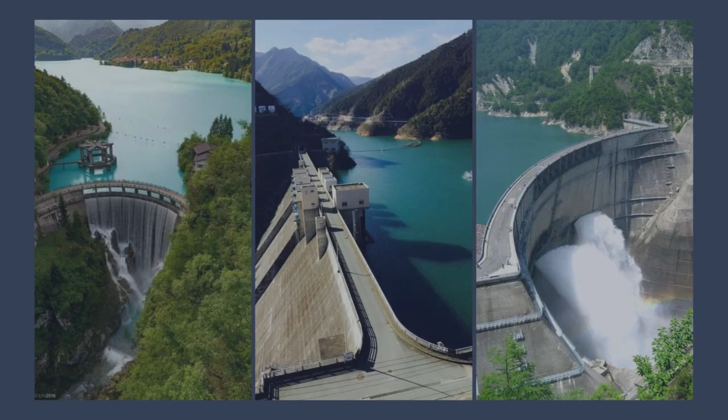Taman Universiti Parit Raja, located in Johor, has experienced recurring flash floods, particularly in a specific area outlined in red. These floods result from intense rainfall events and pose a significant threat to the local community and infrastructure.

The flood event was triggered by intense and prolonged rainfall, resulting in a significant volume of water runoff that overwhelmed the existing drainage system. The heavy rainfall, combined with the area's topography and inadequate drainage infrastructure, led to the rapid accumulation of water in the low-lying and vulnerable sections of Taman Universiti. To address this issue, a comprehensive study is undertaken to identify the cause of flooding and propose effective flood mitigation measures.

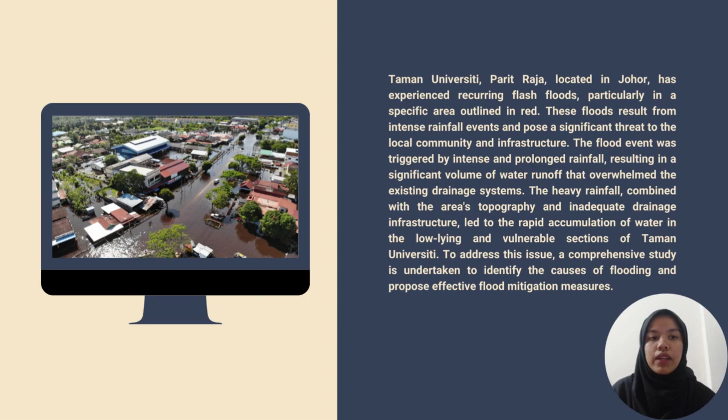The problem statement: the recurring flash floods in Taman Universiti Parit Raja have led to detrimental consequences, including property damage, disruption of daily life, and potential risks to human safety. It is imperative to analyze the underlying factors contributing to the floods and develop sustainable solutions to mitigate their impact.

The objectives of this project are, firstly, to identify the causes of flash floods in the outlined area of Taman Universiti Parit Raja based on the available data and analysis. Secondly, to assess the vulnerability and impact of the floods on the local community, infrastructure and the environment. Thirdly, to propose an effective flood mitigation method tailored to the specific conditions and layout of the area, considering its feasibility, sustainability and cost effectiveness.

Fourth, to enhance the resilience and sustainable development of Taman Universiti Parit Raja by implementing the proposed flood mitigation measure and reducing the frequency and severity of flash floods. And lastly, to contribute valuable insights and recommendations to the local authorities and stakeholders involved in flood management, providing guidance for future planning and decision-making processes.

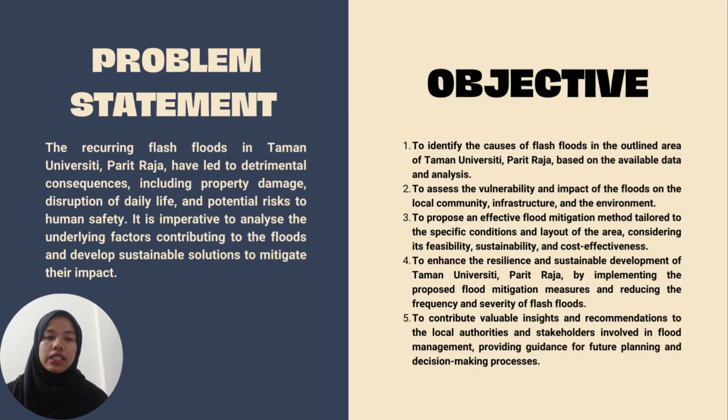Flash flooding is a rapid flooding of low-lying areas, such as rivers and dry lakes. Flash floods may be caused by heavy rain associated with severe thunderstorms, hurricanes, or tropical storms. Flash floods occur within a few minutes or hours of excessive rainfall, a dam, or levee failure. Flash floods can roll boulders, tear out trees, destroy buildings and bridges, and scour out new channels.

Some safety things we can do are evaluate the furnace, water heater, air conditioner, and other utilities. Second, install check valves in sewer traps to prevent flood water backups. Next, construct interior barriers to stop low-level flood water from entering the basement. Lastly, seal walls in the basement with waterproofing compounds to avoid seepage, and do not forget to remove important papers and possessions from the basement.

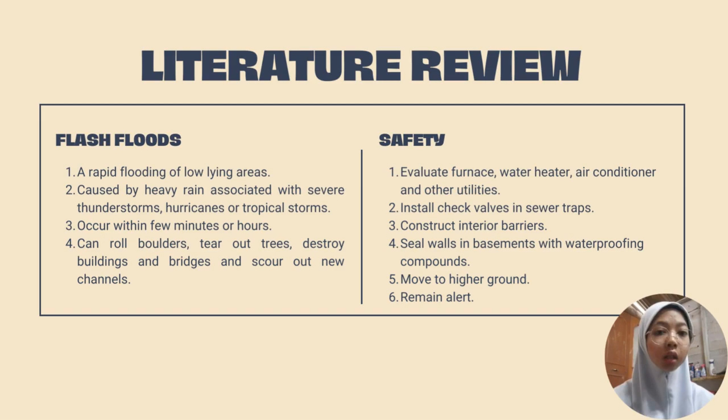Other than that, some safety rules during periods of heavy rain are to stay away from flood-prone areas such as stream beds, drainage ditches, and culverts. Next, move to higher ground if flooding threatens the area. If we live or work in flood-prone areas, remain alert during periods of heavy rain. Be really cautious at night as it is harder to recognize flood dangers.

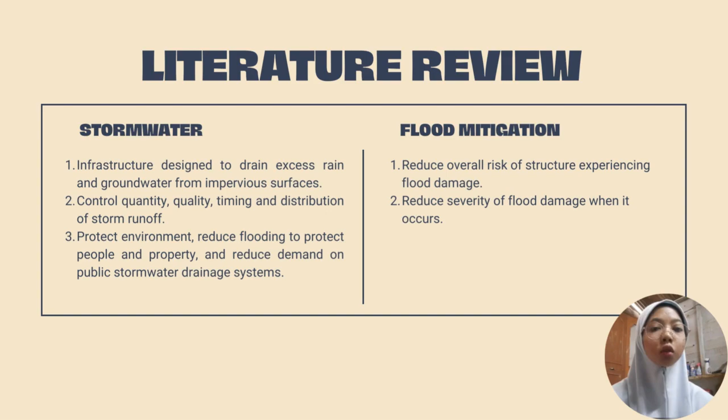A stormwater drain is infrastructure designed to drain excess rain and groundwater from impervious surfaces such as paved streets, car parks, parking lots, footpaths, sidewalks, and roofs. A stormwater system is designed to control the quantity, quality, timing, and distribution of storm runoff. Stormwater management is to protect the environment, reduce flooding to protect people and property, and reduce demand on public stormwater drainage systems. Flood mitigation can reduce the overall risk of a structure experiencing flood damage and also reduce the severity of flood damage when it occurs.

Now, I will present part of the methodology. The first method that our group is using to solve the problem is the Manning roughness equation. The Manning roughness equation is utilized to determine various parameters related to the flow of water in an open channel, such as cross-sectional area, channel slope, Manning roughness coefficient, or normal depth. The equation is Q = (1/n) × A × R^(2/3) × S^(1/2).

Q represents the volumetric water flow rate passing through the stretch of channel. A represents the cross-sectional area of the flow perpendicular to the flow direction. S is the bottom slope of the channel. n is the Manning roughness coefficient, and R is the hydraulic radius. The formula for R is A over P. As we can see in the flowchart on this slide, there is the flow to get the value of Q.

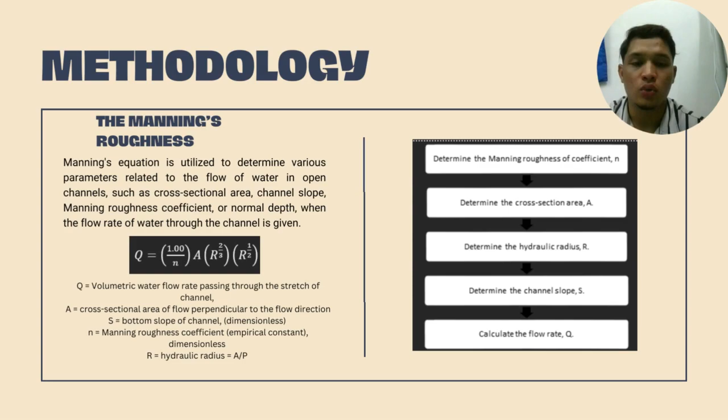Next is channel dimension and area. The channel used in this problem is a trapezoidal channel. The dimensions for this channel are: the bottom is 3800, the top is 5800, and the depth is 1600.

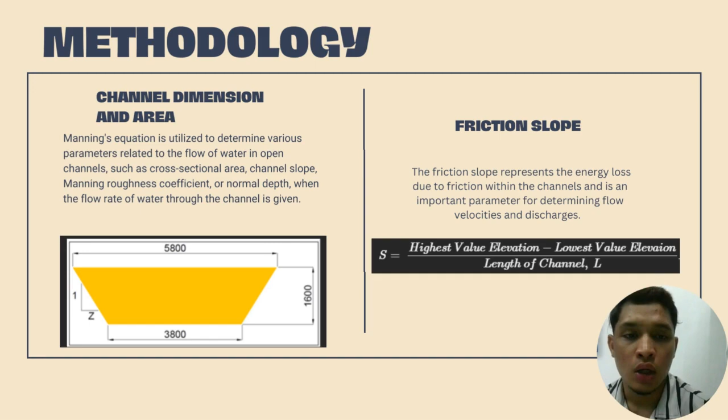Next is friction slope. The friction slope represents the energy loss due to friction within the channel and is an important parameter for determining flow velocities and discharge. The formula for friction slope is the highest elevation minus the lowest elevation divided by the length of the channel.

Next is empirical IDF curve. Empirical IDF curve is an equation that allows for the minimization of error when estimating rainfall intensity value from the IDF curve. The formula is I equal to lambda times t power of k divided by d plus theta power of n. I represents average rainfall intensity, t is average recurrence interval, d is storm duration, and lambda, k, theta, and n are fitting constants depending on the rain gauge location.

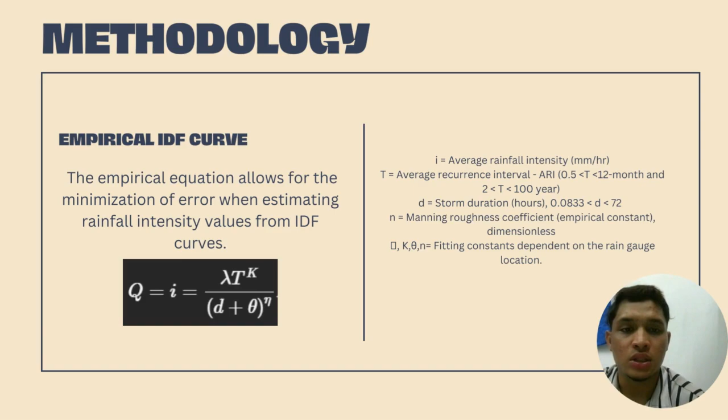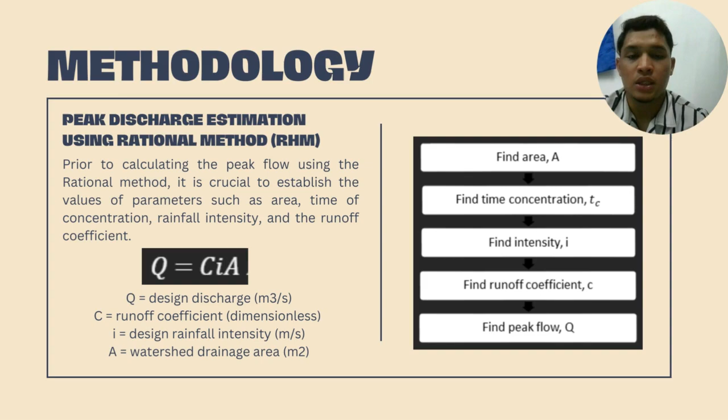For the data and result analysis, firstly, in order to do our calculation, we have to identify the location of the project or case study we have done as a group, which is in Taman Universiti Parit Raja. The drainage we choose is the main drainage that conveys through the network of the residential and shopping area. There are McDonald's, houses, residentials, and a supermarket there. Therefore, we have to calculate the catchment area for those parts.

The area of the case study is estimated using Google Earth Pro. By using Google Earth Pro, we can calculate the area using the polygon tools provided by the software. The total area is 3.77 hectares. Why do we use hectares? Because in the calculation in the Urban Stormwater Management Manual for Malaysia, the calculation uses hectares and acres to simplify the calculation and to cancel out any other area or units used in the equation.

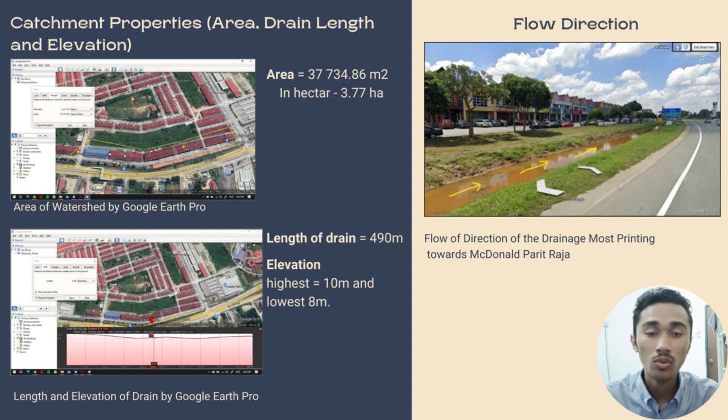As usual, before we calculate anything in the hydraulic subject, we have to identify the parameters of the channel. Firstly, we have to calculate the cross-sectional area of the channel. The channel or drainage is trapezoidal shape, as illustrated in the slide. The top width, bottom width, and depth were measured on site with other group members for us to obtain.

Meanwhile, for the calculation, we use Manning's equation and Manning's roughness coefficient. What is Manning's roughness coefficient? It is the degree of roughness of the surface of the channel. In this case, the channel uses long grass as a type of cover to protect the soil, and this becomes the surface of the channel. We also have to find the slope of the channel bed.

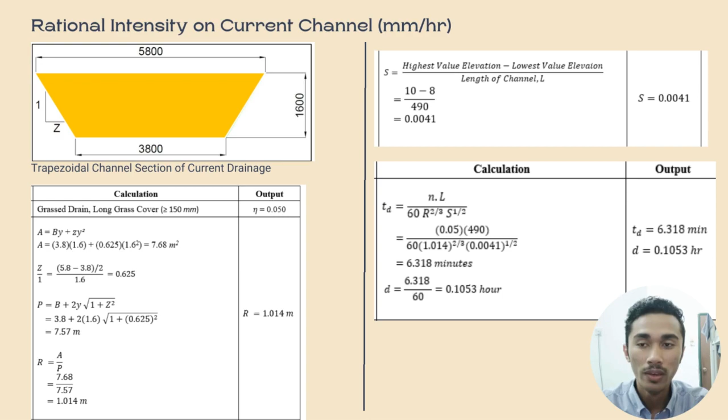For this slide, we are going to show the calculation we have done to calculate the rainfall intensity on the catchment area or the studied area. In order to calculate the rainfall intensity on the area, we must know the state, the station ID, and the station name. This can be obtained from the Urban Stormwater Management Manual for Malaysia.

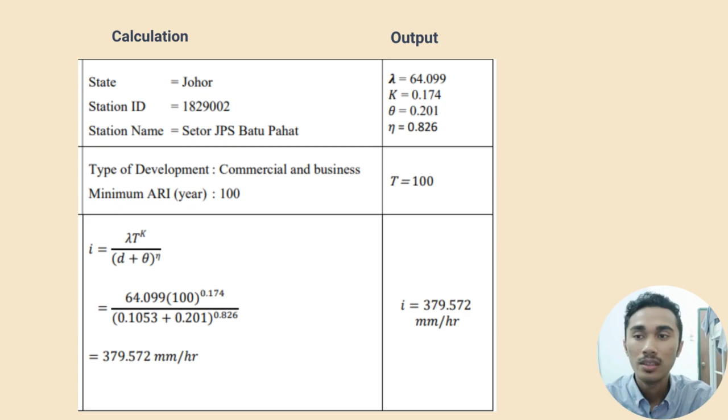To finalize the calculation for the current channel design of the drainage in Taman Universiti Parit Raja, we must calculate the Q peak during the rainfall or storm of the area. This can be calculated using the rational method, using the rainfall intensity we calculated just now in order to get the Q peak, which is the peak discharge, the maximum discharge at that time. So we obtained the maximum discharge of 3.78 meter cube per second.

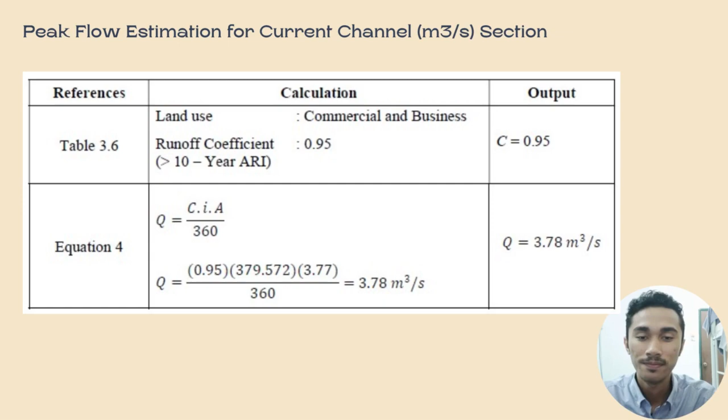After we have calculated the maximum discharge, or Q peak, of the current design of the drainage in Taman Universiti Parit Raja, we have to calculate the new discharge value to be used as an indicator to show whether the new design is sufficient enough to negate or mitigate the flood that occurred during March 2023 at Taman Universiti Parit Raja.

For our proposed new design for the drainage, we are still going to use a trapezoidal cross-sectional channel, as shown in the slide. We're going to enlarge the area by giving more depth and width to the channel. We're also going to do some adjustment on the elevation to increase the slope, hence increase the velocity of the flowing water in the channel.

Because the channel discharge is calculated by Q equals VA, we can calculate that discharge is influenced by, or directly proportional to, the area of the channel. So firstly, to calculate the Q design, or new discharge design, and compare between the new design and the current design of the drainage, we can calculate the area as the first step, along with the hydraulic radius, in order to use the Manning coefficient.

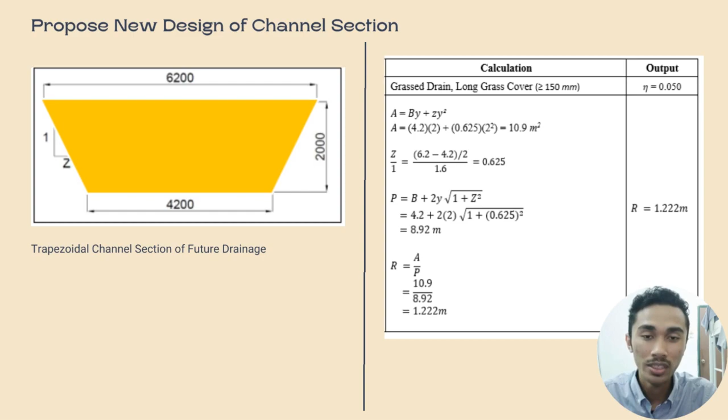As for the last calculation for the new design of the trapezoidal channel in Taman Universiti Parit Raja, we must calculate the area, the hydraulic radius, the slope, and the time of concentration and rainfall intensity on the catchment area. The difference between the current design and the new design we have proposed is in its area and its slope.

Therefore, the amount of rainfall intensity it can withstand before it flows over or rises onto the ground surface is 412.96 millimeters per hour. This means it can withstand a larger amount, or a greater amount, compared to the current design of the trapezoidal channel.

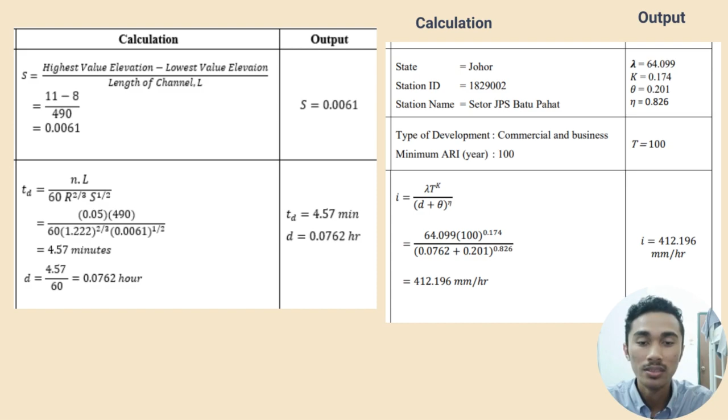So in order for us to estimate the new discharge of the proposed size and slope of the trapezoidal channel, we can calculate using the equation shown in the slide, which is Q equals C times the rainfall intensity times the area of the catchment, divided by 360. We have obtained the new design discharge, which is 4.10 meters cubed per second.

We then compared this to the current discharge in Taman Universiti Parit Raja. We found there is a difference of 0.32 meters cubed per second more water that can be conveyed through the proposed size of the trapezoidal channel, and it can withstand a higher rainfall intensity. Therefore, it can mitigate the flood by doing so.

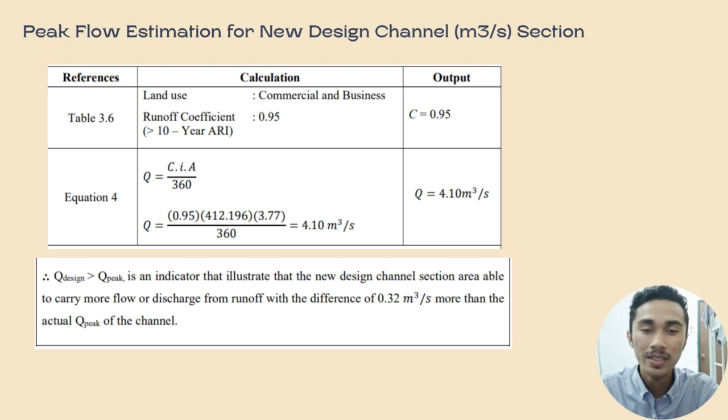For the discussion, from the data obtained in the data analysis, multiple calculations were done to obtain the peak discharge of the current channel section, known as Q peak, and to design a new channel section that is sufficient to convey the surface runoff water with a high discharge value, known as Q design. Here's the result we obtained from the data analysis and calculation.

So for the length in meters, the current design and the new design have the same value, which is 490 meters. For the depth, the current design is 1600 while the new design is 2000. For the bed width, the current design is 3800 and the new design is 4200, and the slope of the bed channel is...

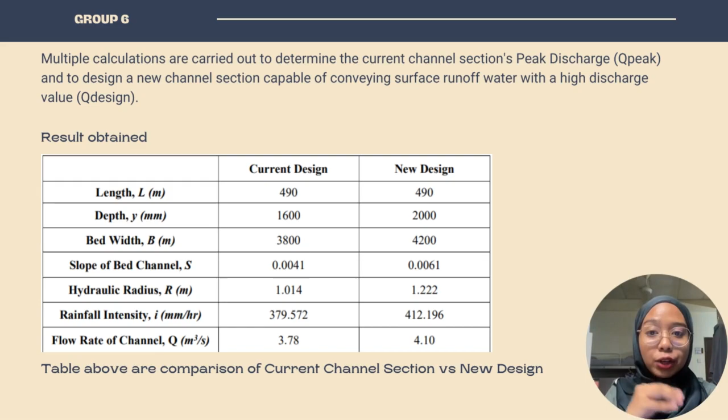0.0041 for the current design, and 0.0061 for the new design. For the hydraulic radius, the current design is 1.014 meter, and for the new design is 1.222 meter.

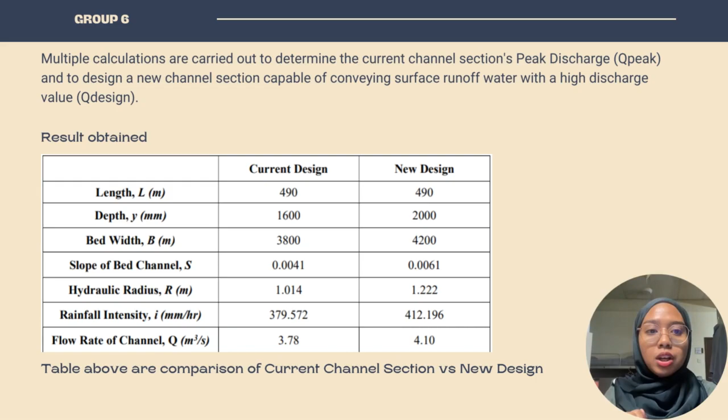For the rainfall intensity, the current design is 379.572, while the new design is 412.196 millimeter per hour. For the flow rate of the channel Q, the current design is 3.78 meter cube per second, while the new design is 4.10.

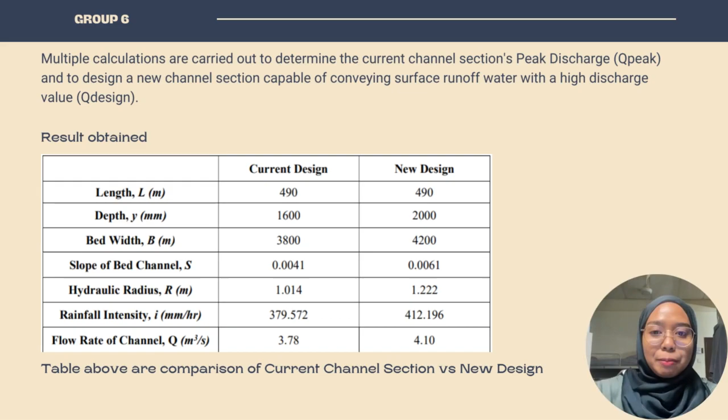Meter cube per second. So next, for the comparative analysis between the current channel design and the new design, it is necessary to take into consideration factors like the channel dimension, the bed channel slope, and the intensity of the rainfall when comparing the new and current channel designs.

For the channel dimensions, if the channel has greater or bigger dimensions, then the flow has a higher capacity to convey through the channel. This is due to the channel cross-sectional area having an impact on the estimation of flow rate. It is directly proportional to the water speed. Therefore, a channel with a larger cross-sectional area will often be able to carry a higher flow rate than one with a smaller area.

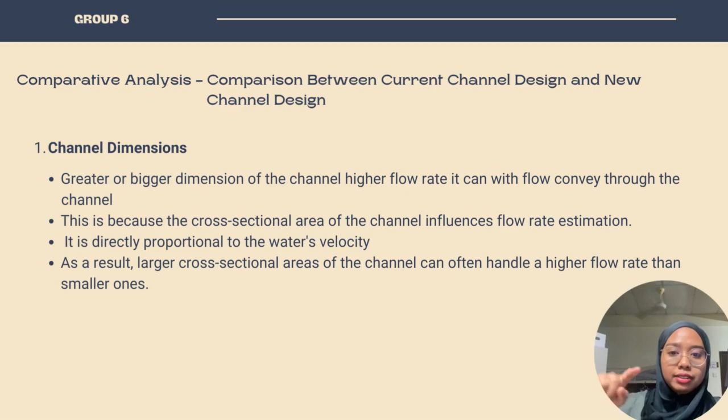Next, for the bed channel slope, the slope plays a significant role in determining the channel flow rate because the flow velocity is affected by gravity and the bed roughness coefficient. This is because water flowing freely in an open channel on a steeper slope moves at a higher velocity than on a less steep slope. However, the water flow velocity in the channel is also impacted by the channel surface roughness, and this can be negated due to the same type of surface being used in both the new and current channel designs.

And for the last factor, rainfall intensity: the rainfall intensity is the ratio of the total amount of rain falling during a certain given period. In this case study, the intensity of the rain was estimated manually using the computation found in the Urban Stormwater Management Manual for Malaysia, known as MSMA.

Influenced by the catchment area, which was given for the case study's study area, it also includes the empirical IDF curve, which differs across Malaysia by its states and stations.

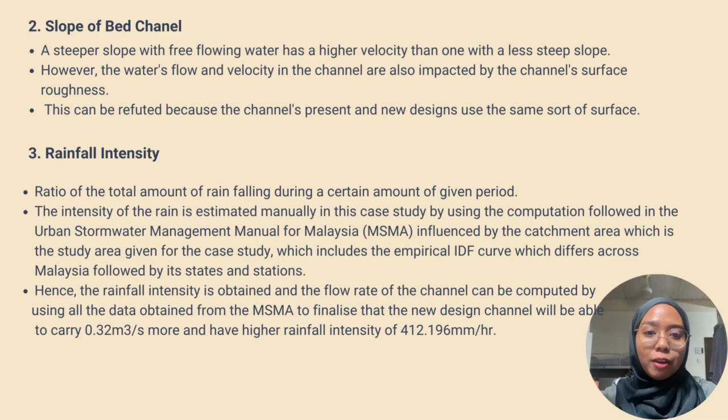Hence, the rainfall intensity is obtained and the flow rate of the channel can be computed using all the data obtained from the MSMA, to finalize that the new design channel will be able to carry 0.32 meter cube per second more and have a higher rainfall intensity of 412.196 millimeter per hour.

Moving on to the last chapter, which is the conclusion. To conclude this case study, there are several processes involved in designing a channel in urban areas, and there are numerous elements to consider when designing a channel network.

To construct a channel and channel network, we need an understanding of hydrology in order to estimate rainfall based on its intensity, duration, and frequency, known as IDF, by state and station throughout Malaysia. Then the engineer will be able to compute and build an optimal channel that will be sufficient during heavy rain or a prolonged storm if they can predict the rainfall intensity at its maximum.

Surely there are other factors such as roughness of the channel, which influences the flow rate of a channel directly, as well as type of development, space for redevelopment, and surface flow criteria which affect it indirectly.

For Taman Universiti Parit Raja Johor, we know that lately we are having an increasing frequency of flooding during the monsoon season. So according to the instruction, the only adjustment that can be made is to modify the channel design into a new channel design.